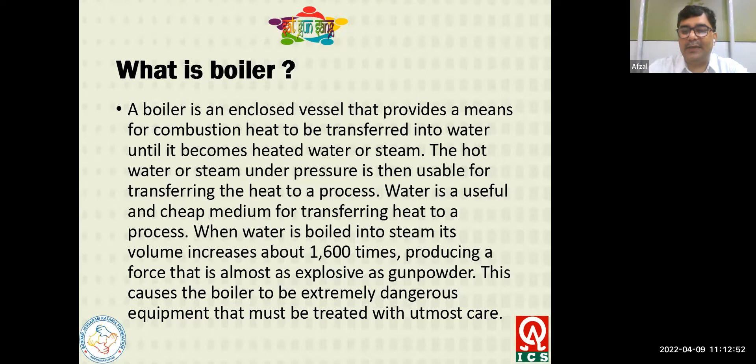Function of boiler: a boiler, as the name suggests, is a device or equipment used to boil the fluid, generally water.

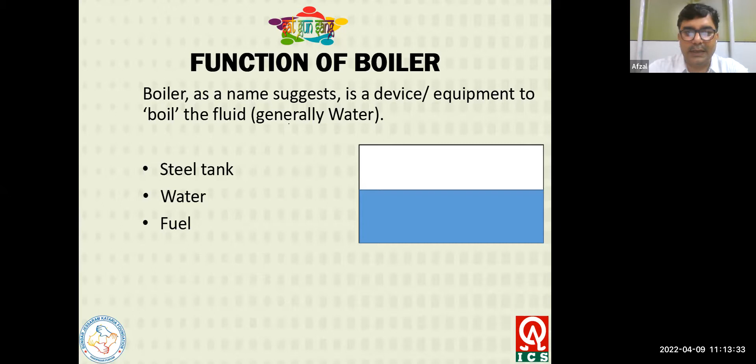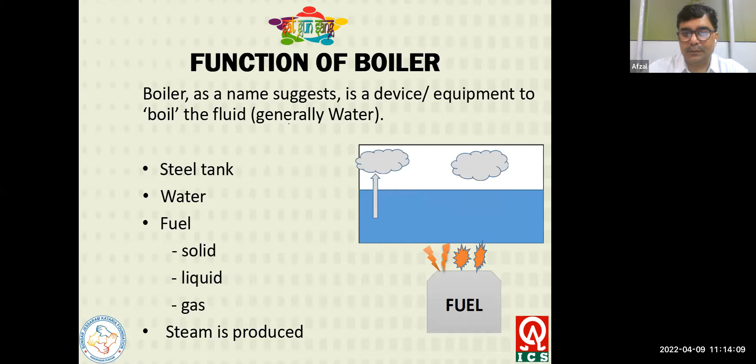Parts of a boiler: basically, when we boil water, we need a container or tank, and a source, which is water, and fuel for providing the heat. Without fuel or without a source of heat, we cannot generate steam. Different types of fuel are used in boilers, like solid fuel, liquid fuel, and gases. When the fuel is heated and burnt, it generates heat. That heat we use to boil the water, and when the water boils, the temperature increases and steam is generated in the container. That steam is produced and used in the boiler. The main purpose of the boiler is to heat water and generate steam. Steam produced can be used for a variety of purposes like power generation, space heating, sterilization and water heating, dyeing, and processing in chemical plants.

Boiler mountings are the set of safety devices installed for the safe operation of a boiler. Mountings are an integral part of the boiler. These are the 7 main mountings on boiler shells required for safe operation: safety valve, steam stop valve, vent valve, pressure gauge, water level indicator, feed check valve, and fusible plug. The location of each device is shown in this diagram. Most of the devices are installed on the top of the boiler.

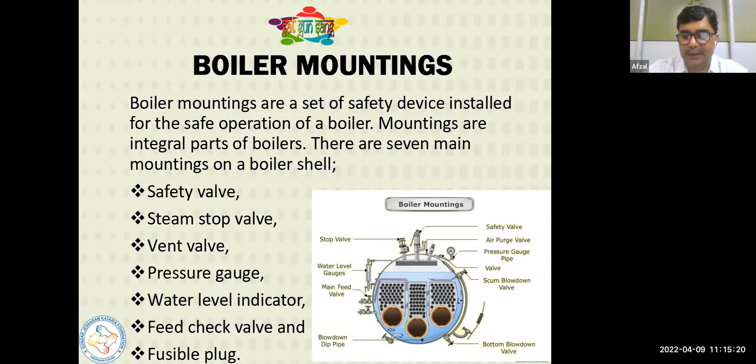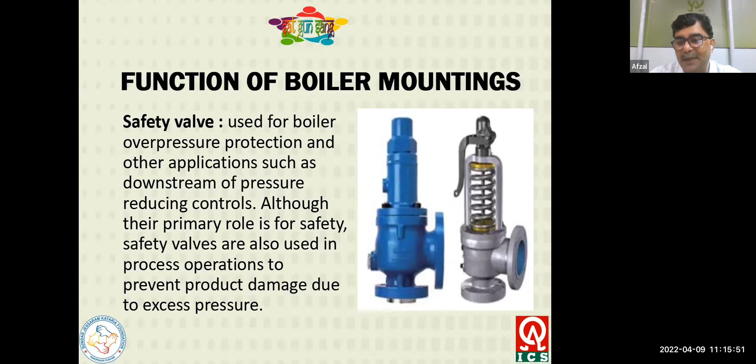Functions of boiler mountings. The safety valve is used for boiler overpressure protection and other applications such as downstream pressure reduction control. Although its primary role is safety, safety valves are also used in process operations to prevent product damage due to excess pressure. This is the safety valve.

Vent valve. The vent valve kept open while starting up the boiler is called the startup vent valve. This valve is useful to vent low pressure, low temperature, moistured steam, as well as to raise steam pressure slowly.

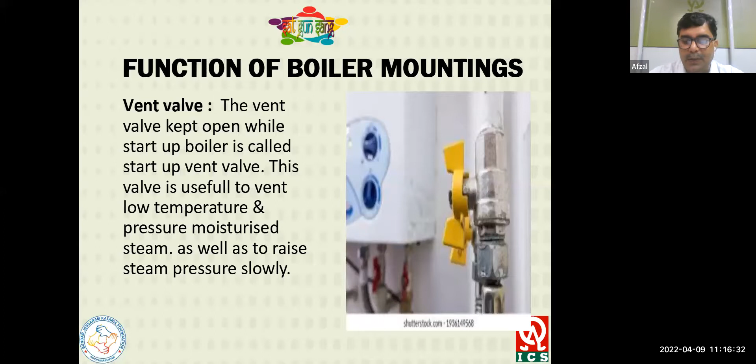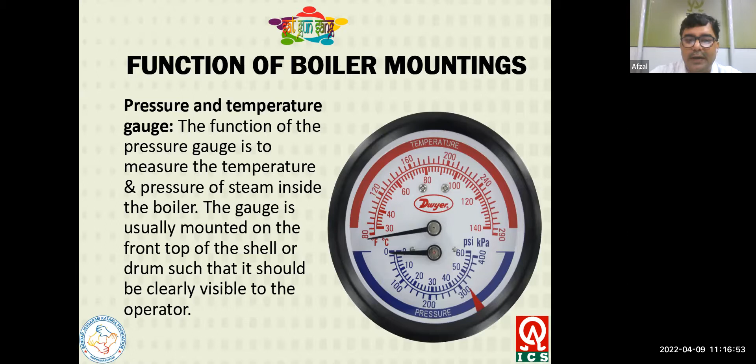Pressure and temperature gauge. The function of the pressure gauge is to measure the temperature and pressure of steam inside the boiler. The gauge is usually mounted on the front top of the shell or drum, such that it is clearly visible to the operator.

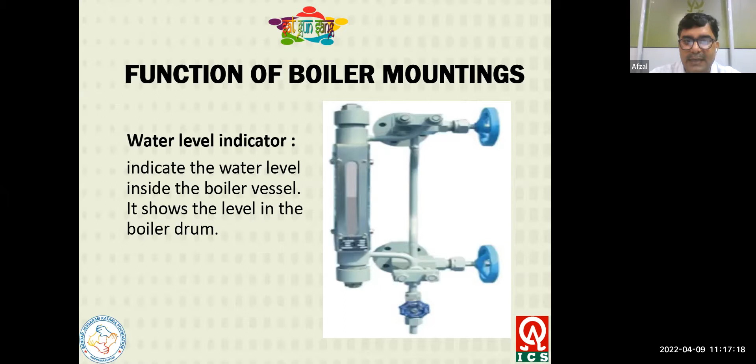Water level indicator. The water level indicator shows the water level inside the boiler drum. We have to maintain the level of water inside the drum so that we can see the water level with the water level indicator.

Feed check valve. Feed check valves are one of the most important components of a boiler, controlling the flow of water from the feed pump to the boiler and further preventing the backflow of water from the boiler to the pump when the boiler pressure is more than the pump pressure or when the feed pump stops working.

Fusible plug. The function of the fusible plug is to protect the boiler from damage due to overheating of the boiler tube caused by low water level. It is simple: a hollow gunmetal plug is screwed into the firebox crown.

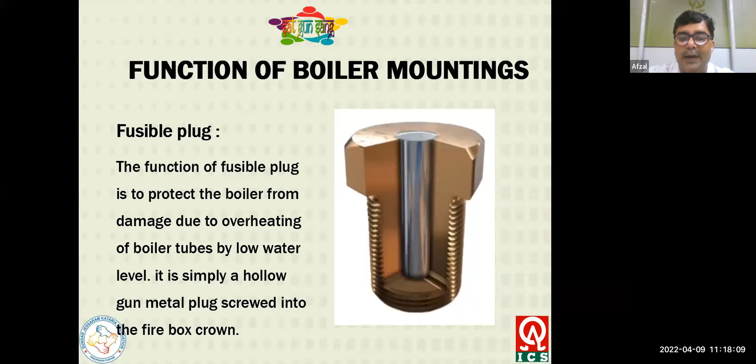Boiler accessories. Boiler accessories are devices that are installed along the boiler and surrounding area to increase the efficiency of the boilers. Most of the accessories are the superheater, economizer, feed pump, and air preheater. The location of all the accessories installed is shown as per the schematic diagram given in this slide.

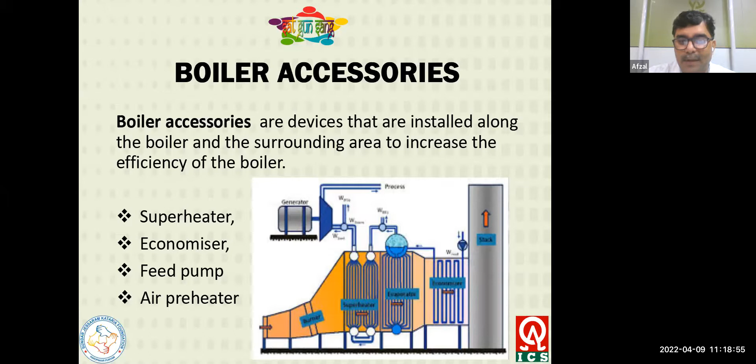Feed pump. The boiler feed pump helps to feed water to the steam generator, such as a boiler. Boilers are pressurized tanks used to heat and vaporize water into steam. In order to produce steam, the boiler and steam generator require feed water.

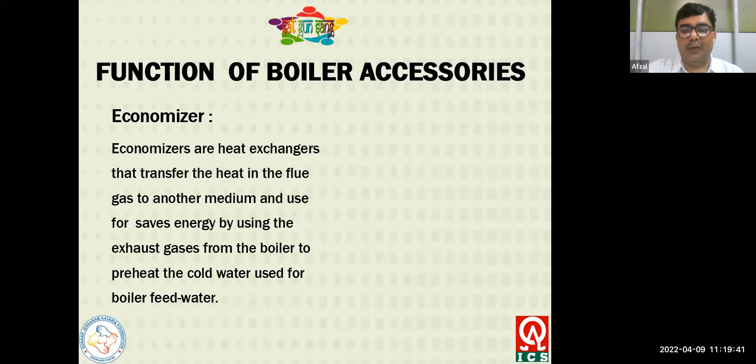Economizer. The economizer is a heat exchanger that transfers heat in the flue gas to another medium, used to save energy by using the exhaust gases from the boiler to preheat the cold water used for boiler feed water. This is the photograph of the economizer.

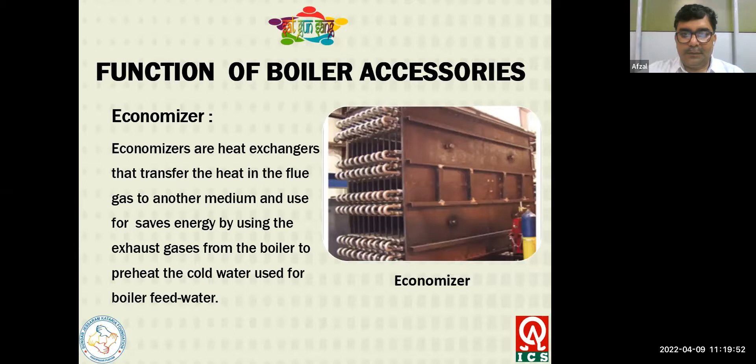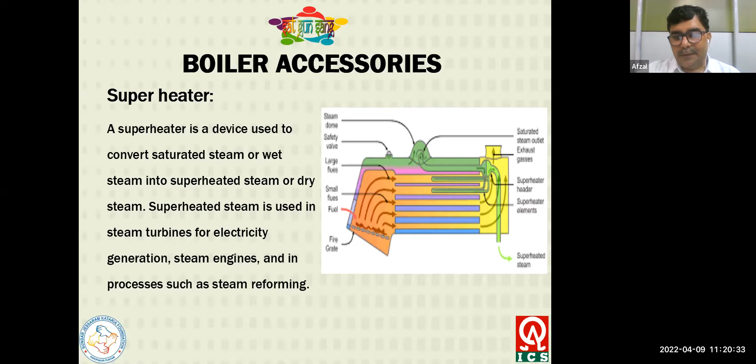Air preheater. The air preheater is a device designed to heat air before another process, for example combustion in the boiler, with the primary objective of increasing the thermal efficiency of the process.

Types of boilers. Boilers are categorized in different manners according to the content in the boiler. Boilers are categorized into two categories: one is called the fire tube boiler, and one is called the water tube boiler.

Fire tube boiler: in the fire tube boiler, the fire or hot gas is present inside the tubes and water surrounds these fire tubes. Since the fire is inside the tube, it is named a fire tube boiler. Heat from the hot gases is conducted through the wall of the tube to the water.

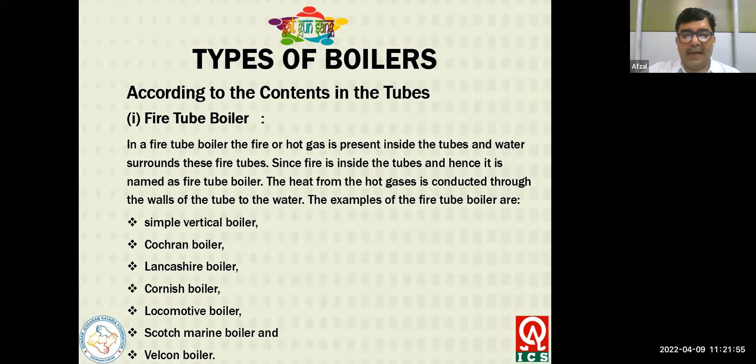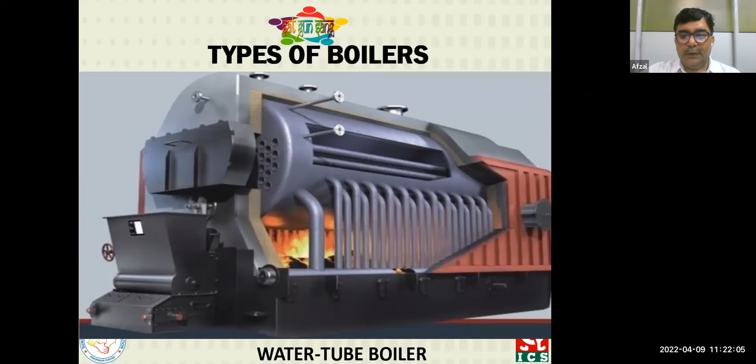Water tube boiler: the water is present inside the tube and fire or hot gases surround these water tubes. Examples of water tube boiler are Lamont boiler, Benson boiler, Stirling boiler, Babcock and Wilcox boiler, Yarrow boiler, and Loeffler boiler.

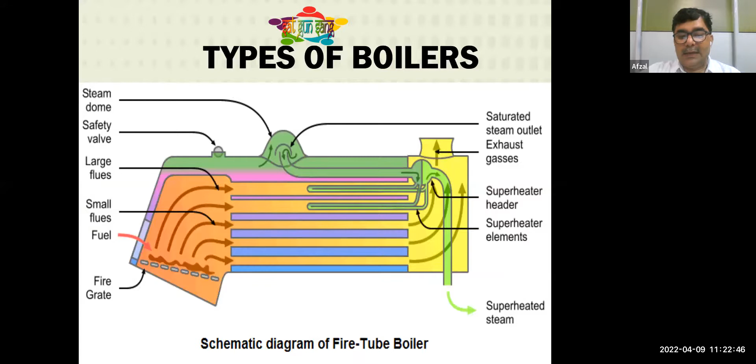This is the fire tube boiler, and earlier was the water tube boiler.

Fire tube boiler versus water tube boiler. Fire tube boiler is a boiler in which the hot flue gases are present inside the tube and the water surrounds this tube. As fire is present inside the tube, it is called the fire tube boiler.

Steam produced by this boiler has a pressure of about 25 bar, so they fall under the category of low pressure boiler. The steam generation rate of these boilers is low, approximately 9 tons per hour. For a given power, the floor area required for steam generation is more, about 8 square meters per ton per hour.

The erection and transportation of these boilers is not easy, because the parts cannot be separated. The overall efficiency of fire tube boiler is about 75%. The operating cost of this boiler is low. It is not suitable for large power plants but is used in small power plants.

Water tube boiler: it is a boiler in which the water is present inside the tube and the hot flue gases surround the tube. Since the water is present inside the tube, these boilers are called water tube boilers.

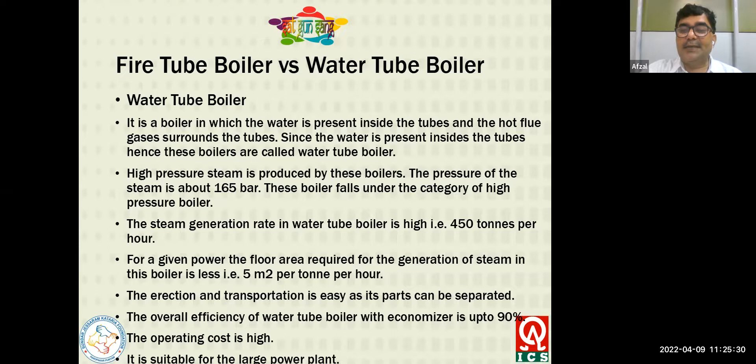Type of boiler according to the number of tubes. According to the number of tubes, boilers are classified as single tube boiler and multi-tubular boiler.

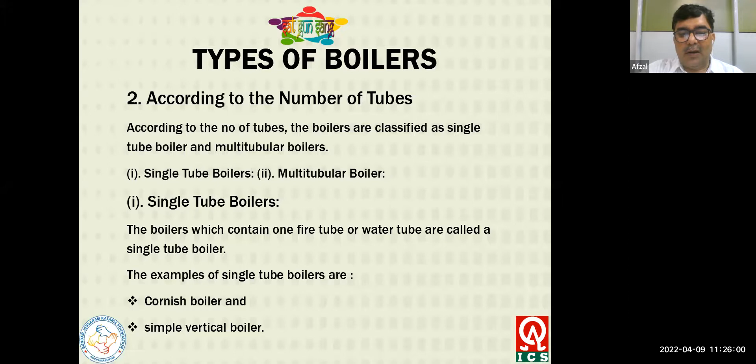Single tube boiler: boilers which contain one fire tube or water tube are called single tube boilers. Examples of single tube boiler are Cornish boiler and simple vertical boiler.

Multi-tubular boiler: boilers which have two or more water tubes or fire tubes are called multi-tubular boilers. Examples of multi-tubular boilers are Lancashire boiler, locomotive boiler, Cochran boiler, and Babcock and Wilcox boiler.

According to the position of furnace, steam boilers are classified as internally fired boiler and externally fired boiler. Internal fired boiler: the furnace is located inside the boiler shell, so it is called an internally fired boiler. Among all fire tube boilers, most are internally fired boilers.

External fired boiler: in the externally fired boilers, the furnace is located outside the boiler shell. Here the furnace is arranged underneath the brick work setting. Water tube boilers are always externally fired boilers.

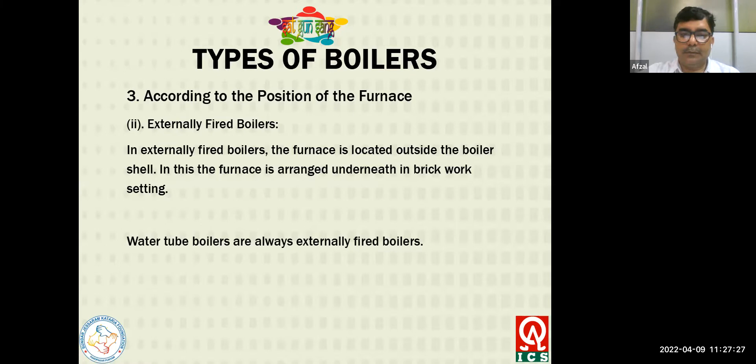According to the axis of shell, boilers are classified as vertical boiler and horizontal boiler. Vertical boilers: boilers in which the axis of the shell is vertical are called vertical boilers. Examples of vertical boilers are simple vertical boiler and Cochran boiler.

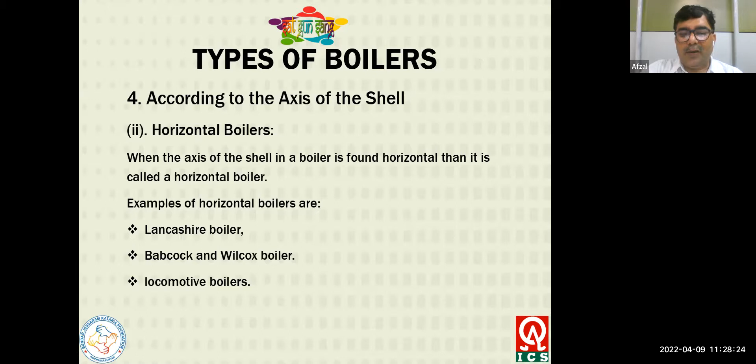Horizontal boiler: when the axis of the shell in a boiler is horizontal, it is called a horizontal boiler. Examples of horizontal boiler are Lancashire boiler, Babcock and Wilcox boiler, and locomotive boiler.

According to the method of circulation of water and steam, steam boilers are divided into natural circulation boiler and forced circulation boiler. Natural circulation boiler: circulation of water takes place naturally by the convection currents set up during the heating of water.

In most boilers, there is natural circulation of water, such as the Lancashire boiler and Cochran boiler, etc.

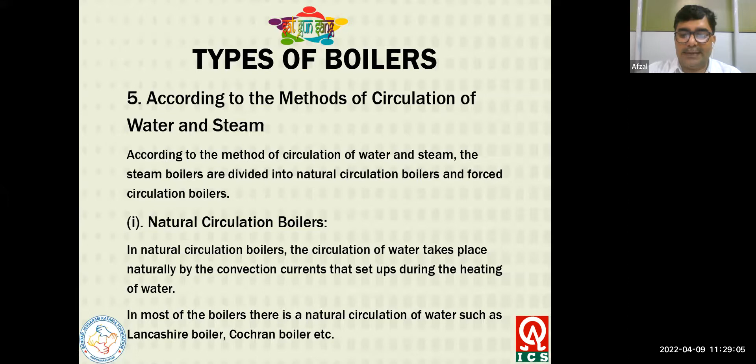Forced circulation boiler: in this type of steam boiler, the water circulation takes place with the help of a centrifugal pump driven by some external power. Here the circulation is forced by some external agency. Forced circulation is used in high pressure boilers such as Lamont boiler, Loeffler boiler, and Benson boiler.

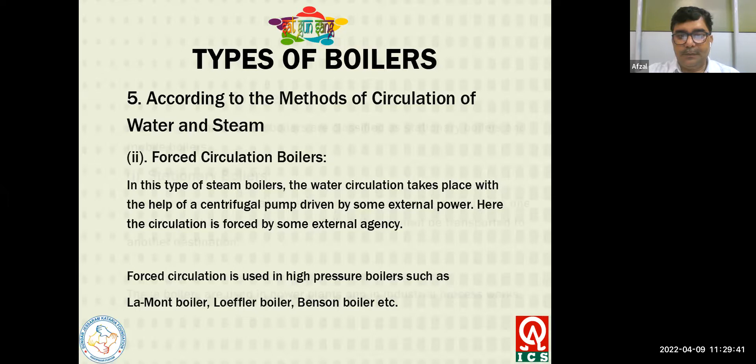According to the use, boilers are classified as stationary boiler and mobile boiler. Stationary boilers are boilers that are stationary and cannot move from one place to another. Once they are installed, they cannot be transported to another destination. These boilers are used in power plants and industrial processes.

Mobile boilers are steam boilers that can be moved from one place to another. Locomotive and marine boilers are examples of mobile boilers.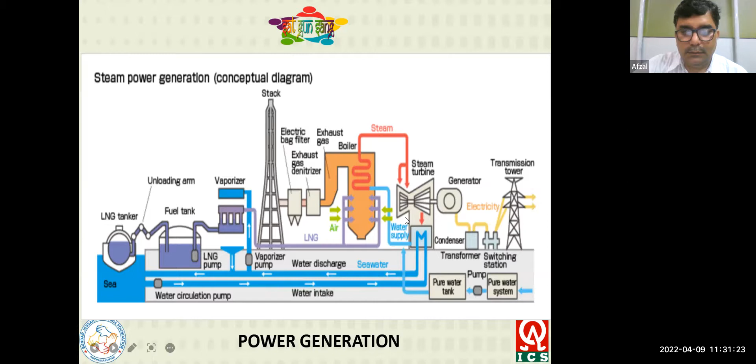History of Indian boiler regulations. Steam boilers are of very ancient origin. The introduction by the famous James Watt improved the steam engine from 1769 to 1775 onward, resulting in great improvement in steam plants. In the year 1863, a very serious boiler explosion occurred in Calcutta, which caused the loss of several lives.

As a result of these explosions, the necessity of boiler inspection was widely recognized, and a bill was introduced in the Bengal Council to provide for inspection of steam boilers. In 1864, the Bengal Act 6 of 1864 was passed, providing for the inspection of steam boilers and prime movers in the town and suburbs of Calcutta. This is the beginning of boiler legislation in India.

The Central Government appointed a committee called the Boiler Law Committee in 1920 to examine and report on the general question of boiler legislation in India. The committee prepared a draft act, and on this basis the Indian Boiler Act was passed in 1923. The Boiler Law Committee also prepared a uniform set of technical regulations and a model set of administrative rules.

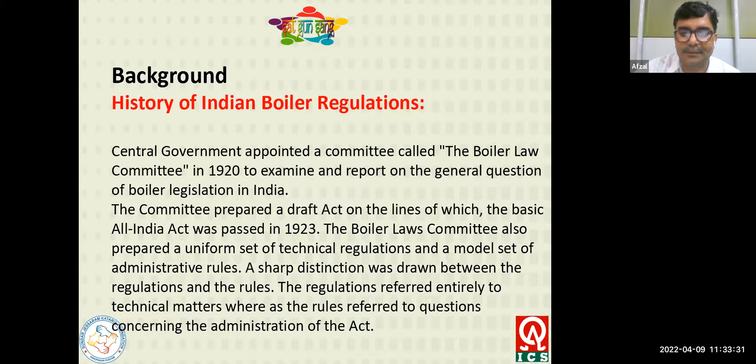The Indian Boiler Act 1923 was enacted with the objective of providing mainly for safety of life and property of persons from the danger of explosion of steam boilers, and for achieving uniformity in registration and inspection during operation and maintenance of boilers in India. The Government of India Act 1935 assigned the subject of boilers to the concurrent field.

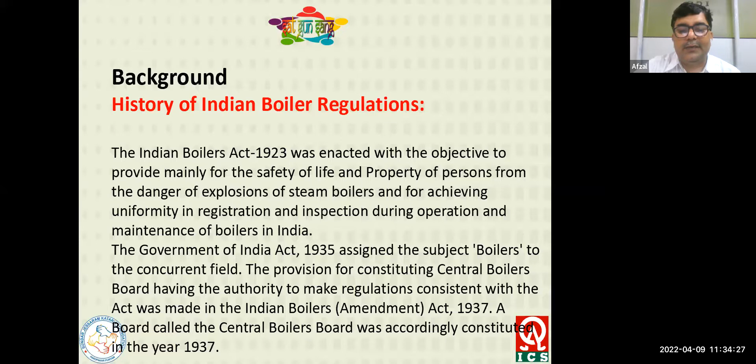The provision for constituting a Central Boilers Board having the authority to make regulations consistent with the act was made in the Indian Boiler Amendment Act in 1937. A board called the Central Boilers Board was accordingly constituted in the year 1937.

The Central Boilers Board, in exercise of the power conferred under Section 28 of the said act, formulated regulations on boilers. The current version of these regulations is known as the Indian Boiler Regulation 1950. With amendments, the Central Boilers Board is responsible for making regulations laying down standards for boiler material, design, construction, registration, and inspection.

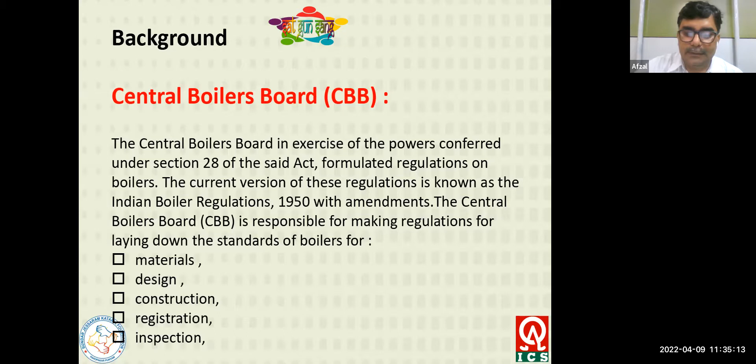Indian Boiler Regulations are standards. IBR, Indian Boiler 1950 - Indian Boiler Regulations are standards for boilers and boiler components for compliance by manufacturers and users of boilers in the country in respect of material, design and construction, operation and maintenance, inspection, testing, and certification during manufacturing or operation and maintenance.

Chapter-wise content in IBR 1950. Chapter 1 talks about the regulations. Chapter 2 covers electric resistance welded steel boiler and superheater tubes for design metal temperature not exceeding 454 degrees centigrade.

Chapter 3 talks about boiler tubes subject to external pressure. Chapter 4 covers regulations for determining the working pressure to be allowed on various parts of the boiler other than fusion welded and seamless forged drums. Chapter 5 covers fusion welded and seamless forged drums for water tube boilers and superheaters.

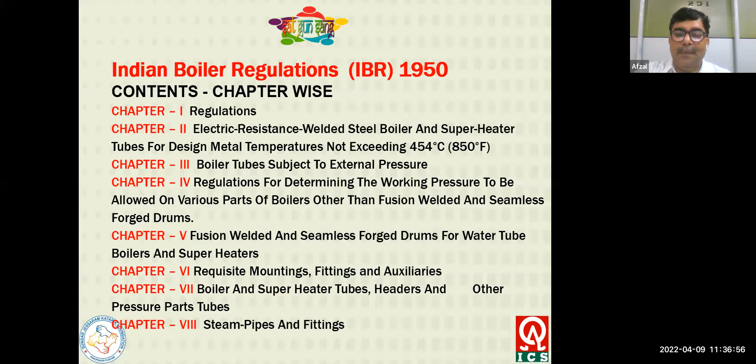Chapter 6 covers requisite mounting and fitting and auxiliaries. Chapter 7 covers boiler and superheater tubes, headers, and other pressure part tubes. Chapter 8 covers steam pipes and fittings. Chapter 9 covers regulations for registration of boilers and inspection of boilers and steam pipes.

Chapter 9A covers safety of persons inside the boiler. Chapter 10 covers electrode boilers, general requirements. Chapter 11 covers standard conditions for the design and construction of economizers, feed pipes, feed heaters, and other similar vessels. Chapter 12 covers shell type boilers of welded construction.

Chapter 13 covers qualification tests for welders engaged in welding of boilers and steam pipes under construction, erection, and fabrication at site in India, and in repairing boilers and steam pipes by welding. Chapter 14 covers regulations made under clause AA of Section 28 of the Act, for small industrial boilers. Chapter 15 covers feed water for boilers, and the last one is the appendix.

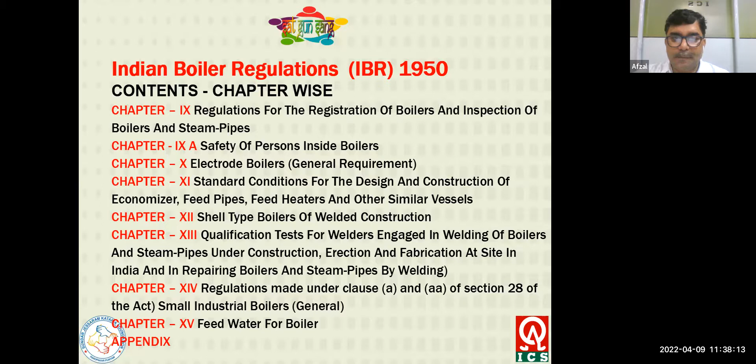Important definitions in these regulations, unless the context otherwise requires. Act means the Indian Boiler Act 1923. Accident means an explosion of the boiler or steam pipe, or any damage of boiler or steam pipe which is calculated to weaken the strength thereof as to render it liable to explode.

Boiler means any closed vessel exceeding 22.75 liter in capacity, which is used expressly for generating steam under pressure, and includes any mounting or other fitting attached to such vessel which is wholly or partly under pressure when steam is shut off.

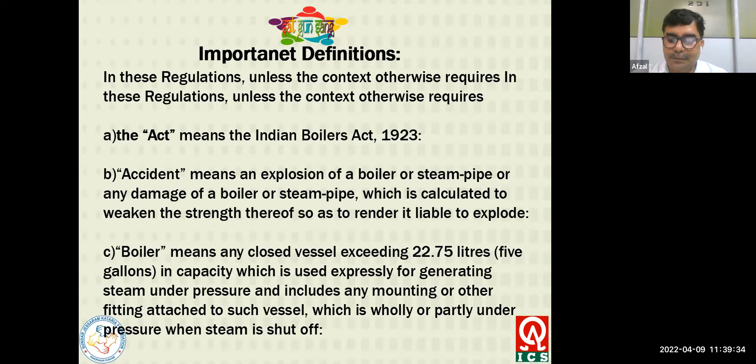Calculation of pressure in relation to the boiler means the design pressure of any part adjusted to take into account the pressure drop corresponding to the most severe condition of pressure drop and hydraulic heads.

Chief inspector, inspector means respectively a person appointed to be chief inspector and inspector under the act. Competent authority means an authority recognized by the Central Boilers Board in the manner laid down in regulation 4A to 4H, competent to issue the certificate to welders for the purpose of these regulations.

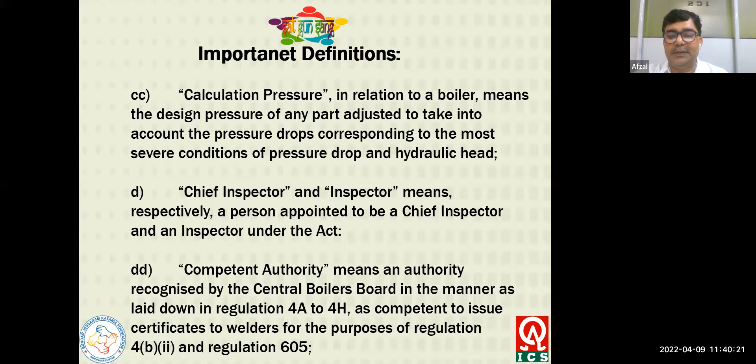Design pressure means, in relation to a natural or assisted circulation boiler, the maximum allowable working pressure in the steam drum of the boiler. In relation to a once-through forced circulation boiler, the maximum allowable working pressure at the final superheater steam outlet. Inspecting authority means an authority recognized by the Central Boilers Board in the manner laid down in regulation 4A to 4H, competent to grant a certificate in Form 2A or 2B.

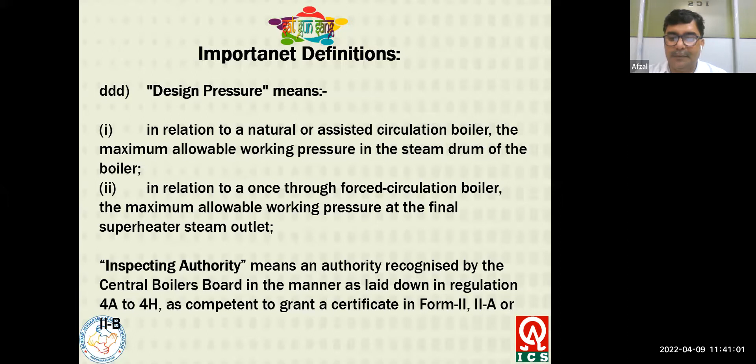Steam lines having a design pressure, maximum working pressure above 3.5 kg per centimeter square from atmospheric pressure. Steam line size above 10 inch inside diameter having a design pressure of 1 kg per centimeter square above atmospheric pressure. So these are the requirements as per the IBR. Boiler and steam lines come under the IBR regulations.

Standard requirements for the material, construction, inspecting authorities, certificates, and maker's stamps.

Material required for the boiler construction. Main elements of the boiler required, forming the shell of the boiler, is a plate. All plate, rivets, bars used in the construction of a boiler shall be tested and found to conform with the regulation hereinafter. Construction: all boilers during construction shall be under the supervision of an inspecting officer.

And shall be inspected at all stages of construction as prescribed in Appendix J of 1950. Tubes and steam pipes shall also be inspected at the maker's works at the stages prescribed in Appendix J, and the tests conducted by the maker shall also be witnessed by the inspecting officer.

Welders engaged in site welding of boiler, steam pipe, economizer, superheater shall possess and produce to the satisfaction of the chief inspector a welder performance qualification certificate issued by the competent authority.

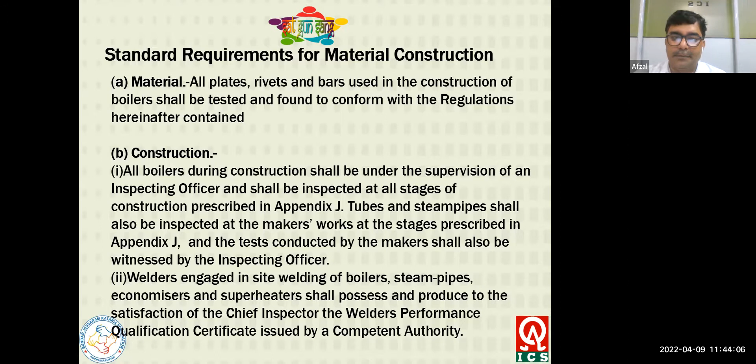A certificate in Form 2 is suggested by the IBR from an inspecting authority, certifying that the material was tested and the boiler was built under their supervision. Together with such certificate, the inspecting authority may furnish a memorandum of inspection in Form 1, prepared in the manner prescribed by Regulation 386.

In respect of inspection of the boiler during construction, and the hydraulic test applied on completion. In case of a boiler which is to be assembled only at site, the requirement of a hydraulic test on the completely assembled boiler by the inspecting authority shall not apply, provided that the individual parts of such boiler have been hydraulically tested and certified by the inspecting authority separately as required under these regulations.

For tube and pipe subjected to internal pressure, a certificate giving results of tests regarding chemical analysis, warm yield 0.2% proof stress, average stress to produce 1% elongation creep in 1 lakh hours, and the average and lowest stress to produce rupture in 1 lakh hours in the material where applicable shall be furnished.

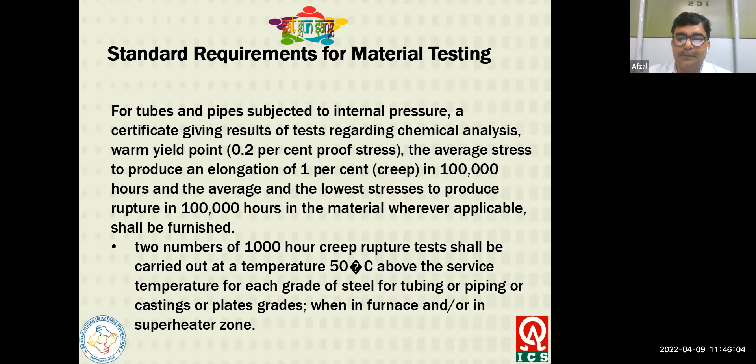Certification requirement: certificate for a steam pipe, a certificate of manufacture and test, is Form 3A, signed by the maker and the inspecting authority, shall be furnished. Certificate for tube, a certificate of manufacturer and test in Form 3B signed by the maker and inspecting authority shall be furnished.

Certificates for mounting and fittings: a certificate of manufacture and test in Form 3C signed by the maker and the inspecting authority, in respect of the boiler mounting and steam pipe fittings during manufacture, shall be furnished. These forms are designed by the IBR.

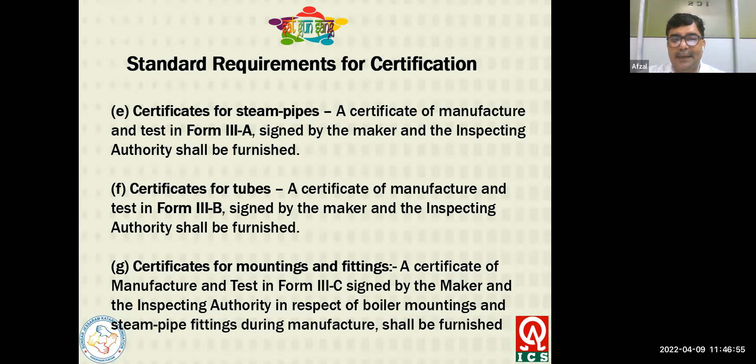Material of construction: steel for plate shall be made by the open hearth, electric furnace or basic oxygen process, or any other process which gives steel having equivalent specified properties.

Plate for carbon steel shall conform to one of the following 4 grades of tensile strength: 37 to 45 kilogram force per mm square. These are the 4 categories of tensile strength. As per the IBR, the classification of plates is categorized into 4 categories based on the range of tensile strength of the steel plates.

The steel shall not contain more than 0.05% of sulfur or phosphorus.

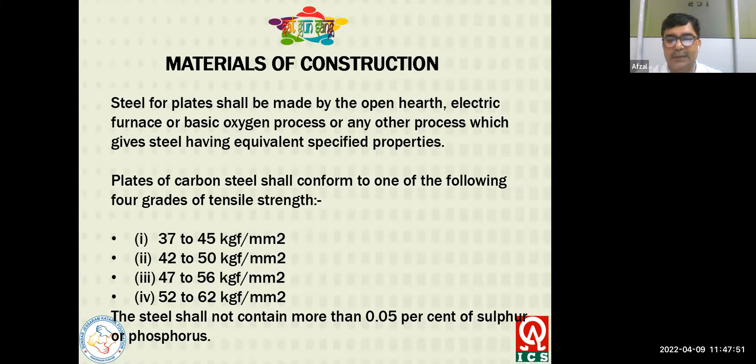For the bend test of plate of all grades of steel, the test piece shall withstand, without fracture, being bent cold through 180 degrees around a mandrel, the radius of which shall have a relationship to the plate thickness as given below.

Edges of all plates and butt straps shall be machine or flame cut. All edges shall be beveled at an angle not sharper than 70 degrees to the plane of the plate, and between 70 to 80 degrees where practicable.

Plates which are to be flame cut by machine, without heat treatment or subsequent grinding or machining, shall not have a carbon content higher than 0.26%. Where the carbon content exceeds this, heat treatment, grinding or machining shall be carried out.

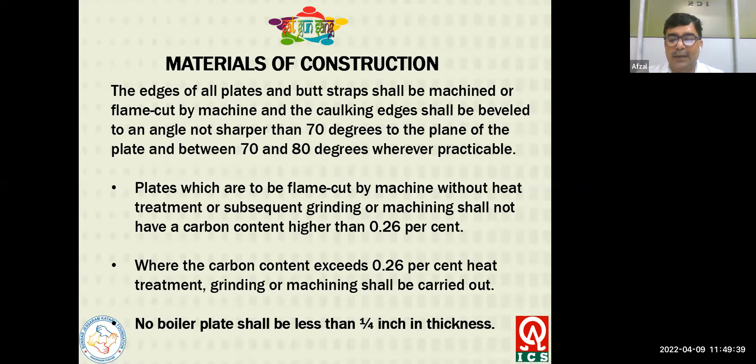No boiler plate shall be less than 1/4 inch in thickness used in the boiler, according to the IBR regulations.

Design requirement: as per the IBR, the factor of safety shall in no case be less than 4. However, as per the ASME Boiler and Pressure Vessel Code, International Boiler Pressure Vessel Code, Section 8, Division 1, the factor of safety requirement is 3.5 for non-bolting material, or 4 to 5 for bolting material. This means the IBR is more stringent than the international ASME code, Section 8.

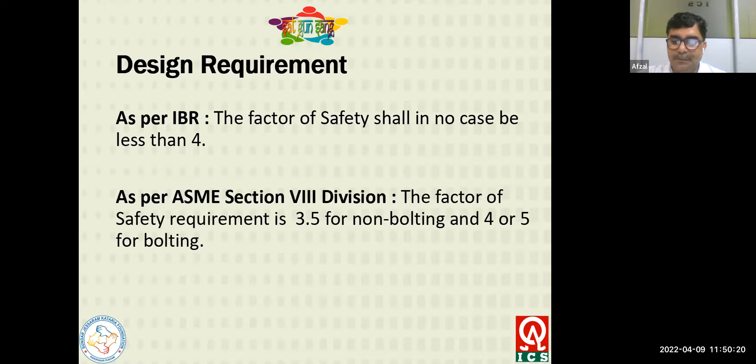Every boiler shall be provided with at least the following: 2 safety valves, one of which may be a high steam and low water type safety valve. In no case should the bore of the seat of the valve be less than 19 mm.

2 means of indicating the water level, a steam pressure gauge, a steam stop valve, feed check valve, 1 feed apparatus, a blow down cock or valve, a fusible plug, and attachment for the inspector's test gauge, which is required for pressure measurement.

Testing requirements: on the component before assembly, for cast iron tube, headers and bends, the hydraulic test pressure in lbs per square inch is twice the working pressure, with a minimum pressure of 700.

For steel tube and bends, if the design pressure is 500 or less, the hydraulic test pressure should be 1000 lbs per square inch. Above 500 but not exceeding 1000, it is twice the working pressure. If the design pressure is above 1000, the hydraulic test pressure should be 1000 above the working pressure.

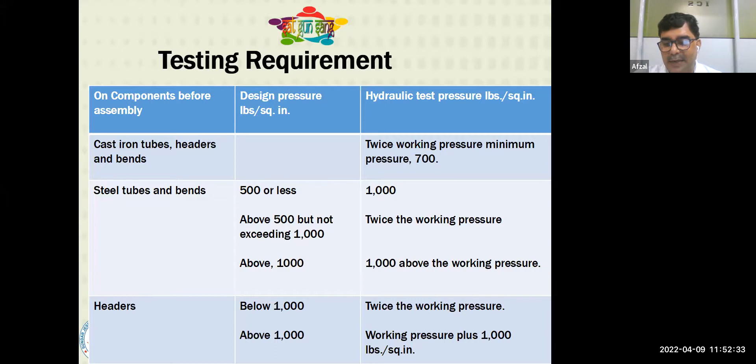Testing requirements as per the IBR: for all assembled sections, the hydraulic test pressure shall be not less than 1.5 times the working pressure. Working pressure shall be the highest pressure at which the economizer relief valves are to be set.

As per ASME Section 8, Division 1, test pressure should be not less than 1.3 times the maximum allowable working pressure of the vessel. It means it is more stringent. IBR regulation is more stringent for testing requirement, which requires 1.5 times the maximum allowable working pressure.

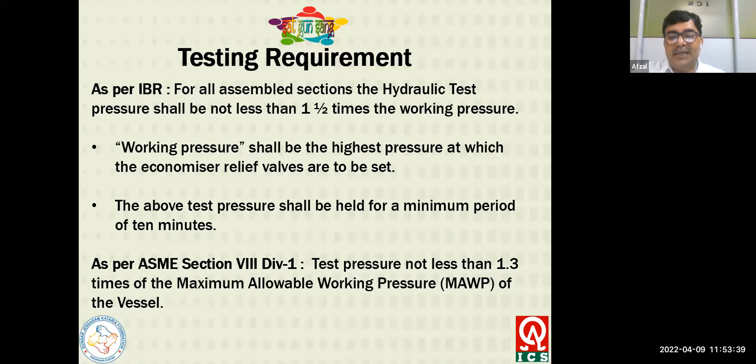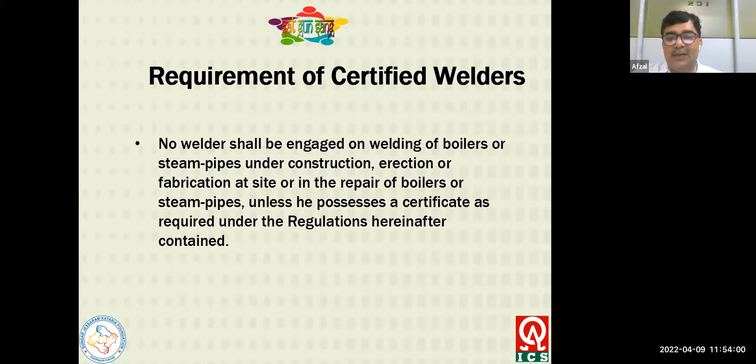Requirement of certified welder: No welder shall be engaged on welding of boiler or steam pipe under construction, erection, fabrication at site, or repair of the boiler or steam pipe unless they possess the certificate as required under the regulation hereinafter contained. Initial qualification test and issue of certificate.

Every welder shall be duly tested and qualified to the satisfaction of the competent authority, who shall assess his performance for qualification for the certificate. The competent authority may thereafter issue a certificate in Form 13, indicating the class and type of welding in which he has qualified.

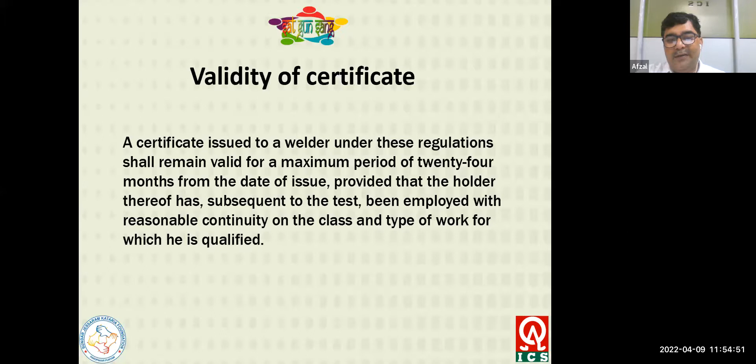A certificate issued to the welder under this regulation shall remain valid for a maximum period of 24 months from the date of issue, provided that the holder has subsequent to the test been employed with reasonable continuity on the class and type of work for which he is qualified. Revalidation of certification.

The certificate may be extended from time to time for a period not exceeding 24 months at a time, on completion of a requalification test to the satisfaction of the competent authority. A welder qualified for type and process of a higher grade of steel can be allowed to weld with a lower grade of steel.

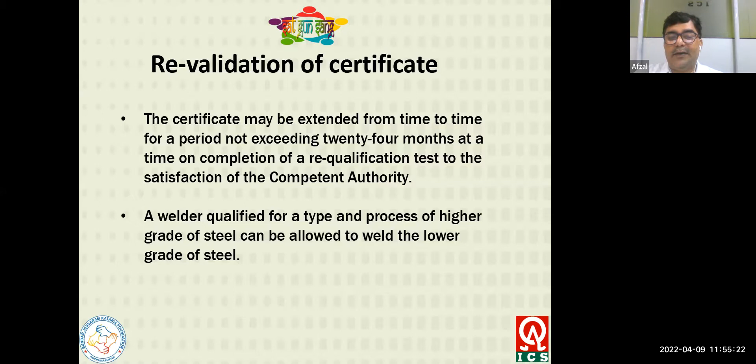Validity of certificate: A welder shall appear for a requalification test consequent upon any of the following conditions, namely: omission of backing strip in arc welding single welded butt joint, or addition of backing strip in gas welding, change in the class of electrode, change in the base material to be welded, or if during the preceding 3 months or more the welder has not been engaged in the welding of the type or class for which he is qualified.

If there is some specific reason to question the welder's ability, a change from one welding process to any other process, or a change from direct current to alternating current and vice versa - these are the essential variables for welder requalification.

Awarding of marks: Marks shall be awarded in accordance with Form 12. Candidates obtaining marks not less than 60% in the oral or written exam and not less than 75% in the practical test shall be deemed to have qualified for the certificate, provided the bend tests are found to be satisfactory.

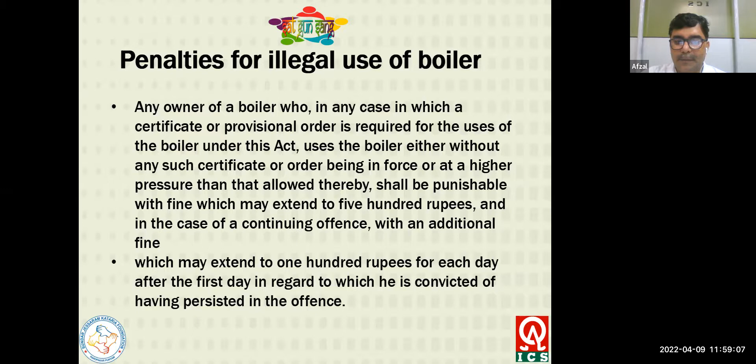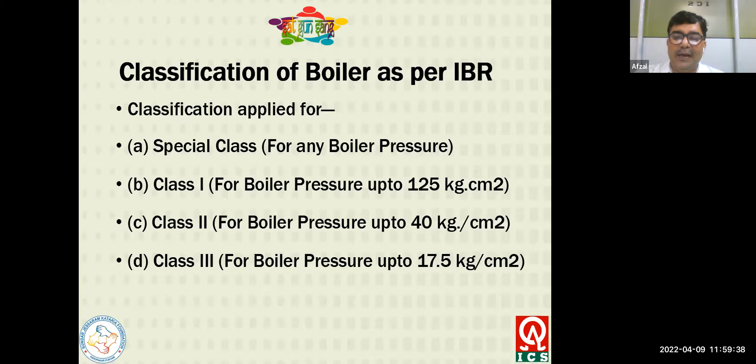Classification of boilers as per IBR: there are 4 classes. Special class is applicable for any boilers. Class 1, 2, 3 follow: Class 1 is for boiler pressure up to 125 kg per centimeter square, Class 2 for boiler pressure up to 40 kg per centimeter square.

And Class 3 for boiler pressure up to 17.5 kg per centimeter square. Hydraulic and hammer test for Class 1 boiler: each Class 1 boiler shall, on completion of all welding repairs after heat treatment, be subjected to a hydraulic test of 1.5 times the design pressure without any indication of weakness or defect.

For Class 2 and Class 3 boilers, each shall be tested to a pressure twice the design pressure. The test shall be witnessed by the inspecting authority or inspecting officer, and the test pressure shall be maintained for a period not less than 30 minutes. It is important in the interest of safety that the boiler be properly vented so as to prevent formation of air pockets before the test pressure is applied.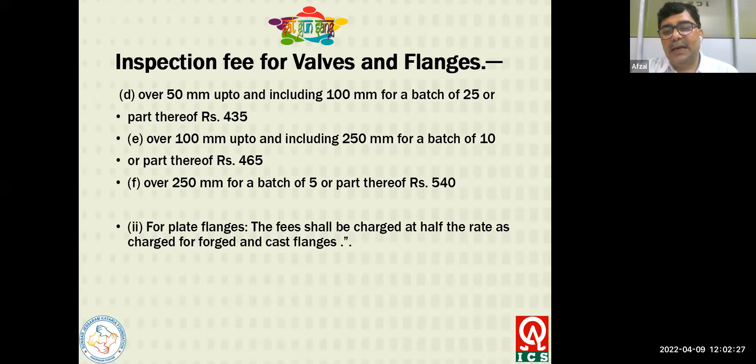So these are the charges, and registration charge also differs based on the area of the exchanger or area of boilers.

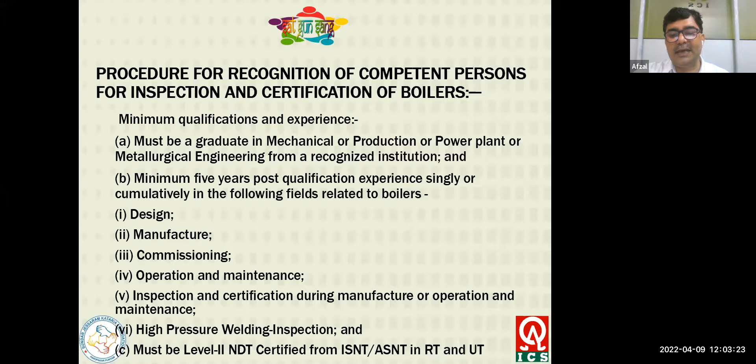Procedure for recognizing competent persons for inspection and certification of boilers. Minimum qualification: must be graduate in mechanical, production, power plant or metallurgical engineering from recognized institutions. Minimum 5 years post-qualification experience, singly or cumulatively, in fields related to boilers such as design, manufacturing, commissioning, operation and maintenance, inspection and certification during manufacturing and operation and maintenance. For high pressure welding inspection, must be Level 2 NDT certified from ISNT or ASNT in RT and UT.

Central Boiler Board examination process: this competency exam is conducted by the CBB. The process includes a written exam consisting of design, manufacturing, operation, maintenance of boiler, non-destructive testing techniques, and inspection and certification of boiler during manufacture and use as per the Indian Boiler Regulation. A viva is also conducted, with 30% weightage given to it. The Central Boiler Board will issue a passing grade certificate to the candidate after passing the examination.

Candidate shall secure at least 60% marks in the written examination. A minimum of 45% marks shall be required in each paper, with an aggregate of minimum 60% across the 2 papers, as well as passing the viva, in order to pass the examination.

Worst boiler accident: SS Sultana in Helena, Arkansas, April 26, 1865. 1,800 people died on the ship because of the failure of the boiler.

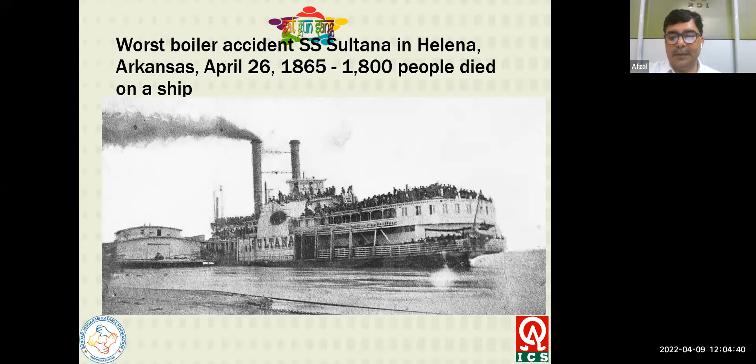Boiler blast at a power plant, NTPC Raebareli, on 1/11/2017. An explosion at this coal-fired power plant killed 16 people and injured around 80. The blast reportedly occurred when a pipe in a newly installed boiler burst, spewing hot ash on workers.

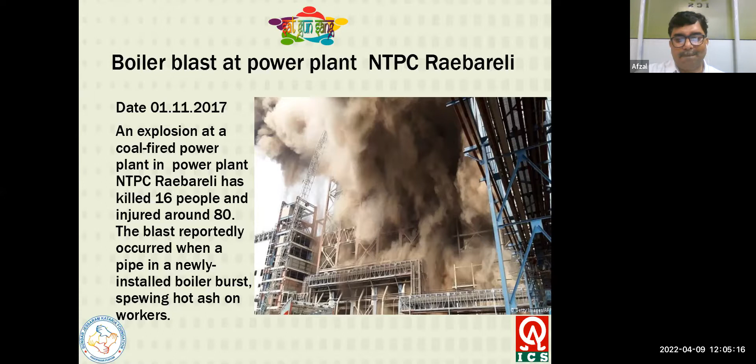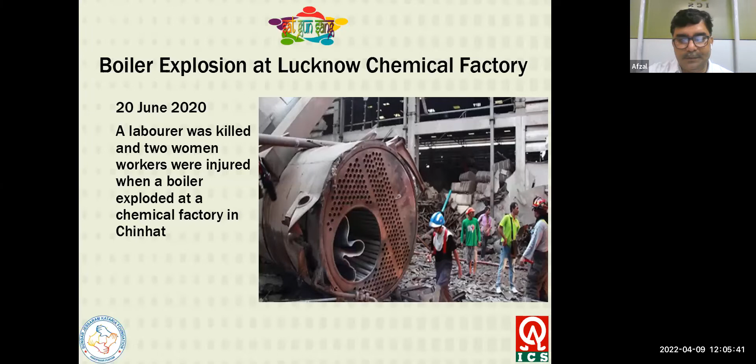Boiler explosion at Lucknow Chemical Factory, 20 June 2020. A laborer was killed and 2 women workers were injured when a boiler exploded at the chemical factory in Chinhat, Lucknow.

One more boiler explosion at Neyveli Lignite Corporation, Tamil Nadu, occurred on 1st July 2020. The mishap occurred at the 5th unit of thermal power station 2 when workers were in the process of resuming operation, which included maintenance work following a shutdown. 6 people died on the spot, while 17 others were injured due to the explosion.

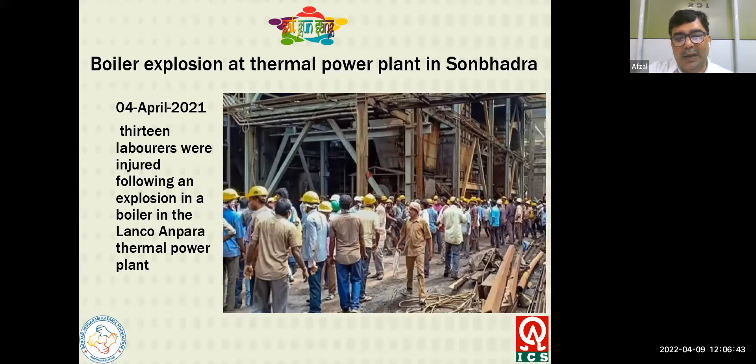Boiler explosion at a thermal power plant in Sonbhadra, April 4, 2021. 13 laborers were injured following an explosion in a boiler at the Lanco Anpara thermal power plant.

Boiler explosion in Bihar, Muzaffarpur, 26 December 2021. 6 laborers were killed and more than a dozen were injured after a boiler exploded in a noodle making factory in Muzaffarpur, Bihar.

Boiler blast in Tamil Nadu, 1st February 2022. 2 migrant workers were killed on the spot, while 3 others sustained injuries in the boiler explosion at Bismi Fisheries Private Limited in Tamil Nadu.

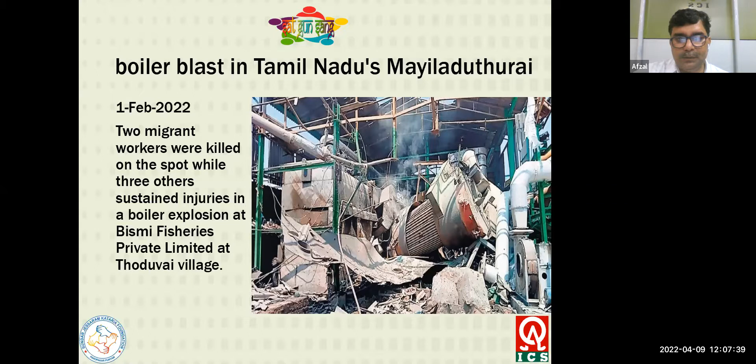A pressure cooker is just like a boiler, but in a very small quantity. When it explodes, it creates a lot of heat and steam. It is a very dangerous equipment, so we must use it safely.

On 11 September 2011, 8 people were injured in a pressure cooker blast at a canteen near the compound of Tata Motors Private Limited. On 9 February 2018, a female midday meal worker suffered burn injuries on her arms and face after a pressure cooker blast in the MDM kitchen.

This occurred at Government Model Senior Secondary School, Sector 44, Chandigarh.

What are the safety measures needed when steaming foods? Stand to the side when opening the steamer, steam jacket, kettle, oven, or other source of steam or hot air. Never reach over a pot or piece of equipment that is vigorously steaming. Wear moisture-resistant, heat-proof gloves, and use long utensils to handle or rearrange the food inside the equipment.

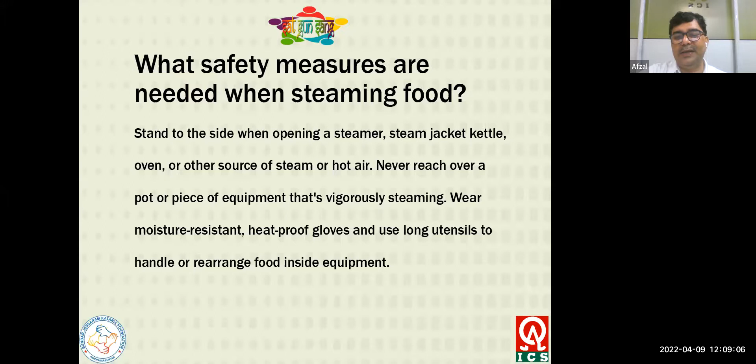Types of hazards in steam: high pressure steam can cause severe burns to the plant or personnel, or even fatalities. High pressure steam leaks are typically invisible to the human eye but are very noisy. Consequently, it's hard to detect the presence of a pinhole leak in a pipe or fitting in a noisy environment.